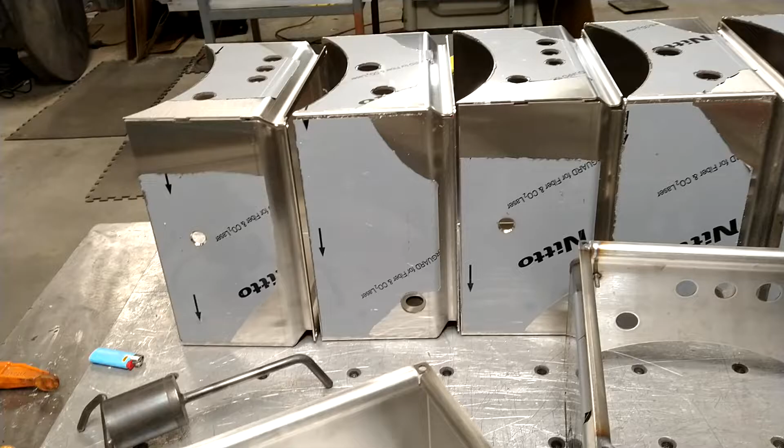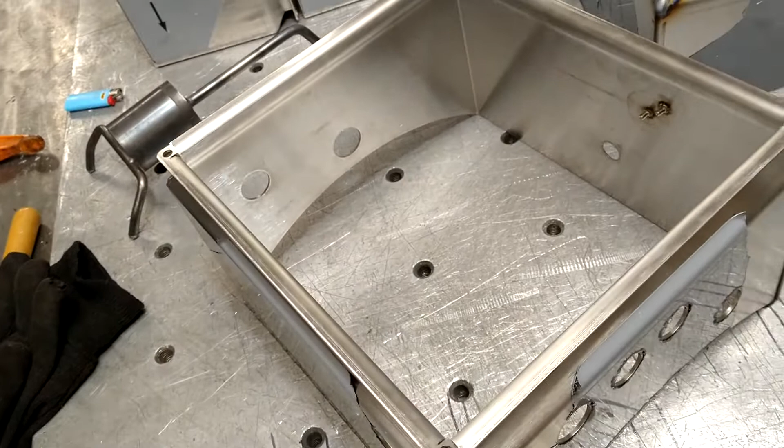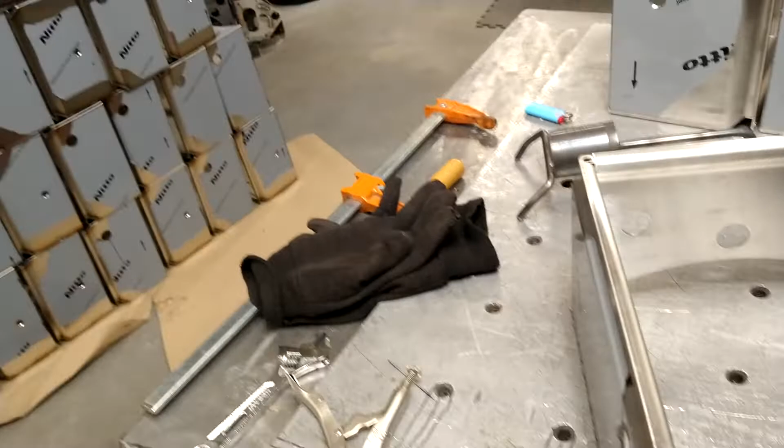In this video, I'll talk about how it's always good to have another source of income, not just one. I know they always say to stick with your career, but I want to show you some of the different things where I get my income.

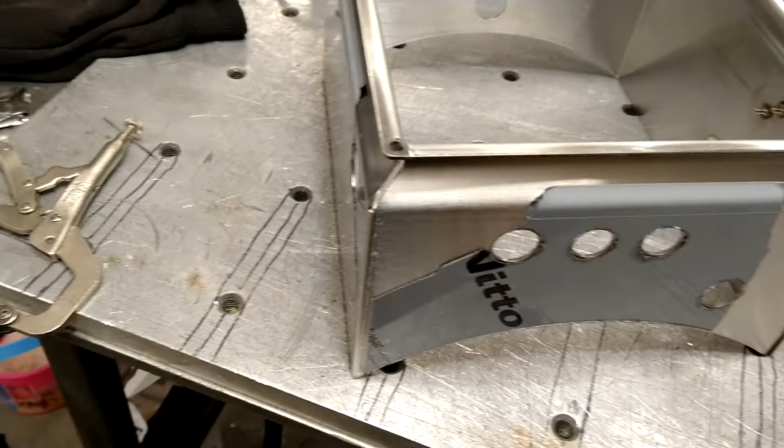One of them is welding. I get all this stuff sent in, and then I weld it. Everything is formed just like this, so all I have to do is weld it. They'll send me the print, I quote the job, and then I go pick them up, or sometimes they drop them off. But you always have to take into consideration the travel and all that.

Like in stainless steel, one thing I never used to quote was taking the masking off. I'd just look at the print, look at the material - 316, 08, whatever, 304 - and never took into consideration the masking, which takes a lot of time to peel off, cut out, and get ready. I should have put my kids to do it, but it still would take them a long time to take the paper off. So now I always ask if it has masking on it, and they let me know yes or no, and then I know how to go from there.

So that's my second main income. My first income is making mazes out of acrylic. I make mazes for this company, a lot of different products, most of them special one-time deal things. I make a lot for mice and rats, and that's what I got this CNC router for, where I cut all their parts.

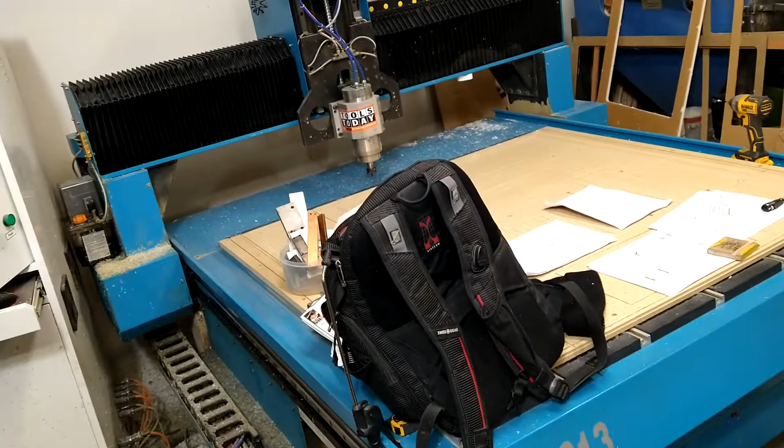My second thing is the welding. My third thing is like guards - I just got an order for 3 guards for COVID, for the stores. So here it is, I sell this online or around the area here. This is from a temp agency, they've got a couple places everywhere. They already bought a whole bunch of them for me, and usually order 3 or 4 at a time. They always have some weird sizes, and that's another income I have, making those.

So basically when COVID hit, one area slowed down, but over here it picked up pretty good to compensate for what welding kind of slowed down. The maze business also slowed down when COVID hit, but this already picked up.

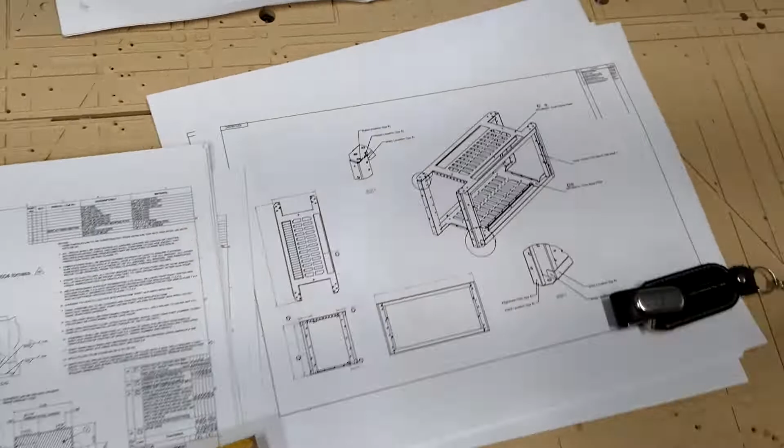Stuff like that - they'll send me jobs, like right now I'm gonna quote this job. This is a new customer, some kind of boxes, I don't know. The only thing is some are galvanized and some are cold roll, so I still don't know.

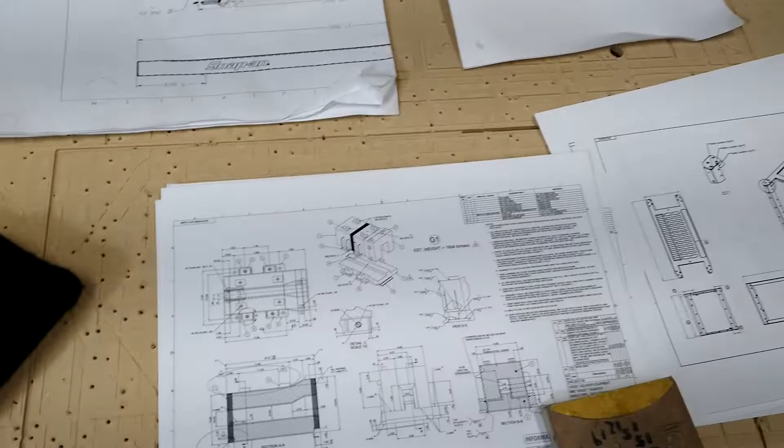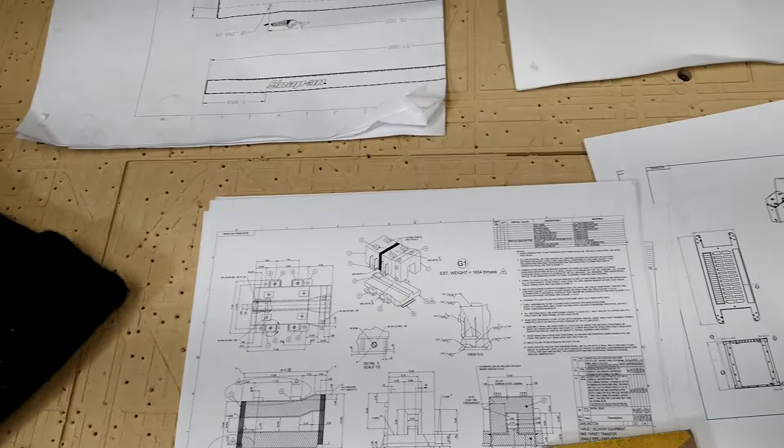And then this is for nuclear plants. I made a few before, I forgot to make a video about it. They go up to Canada, it's to hold radiation. These boxes, they fill them up with lead, and I made 7 of them. It was a nightmare, but it's pretty good money on it. They pay pretty good, but you have to have all this crazy certification. I had to take a lot of tests to be able to weld these parts for Canada, and I'm over here on the border of Illinois and Wisconsin.

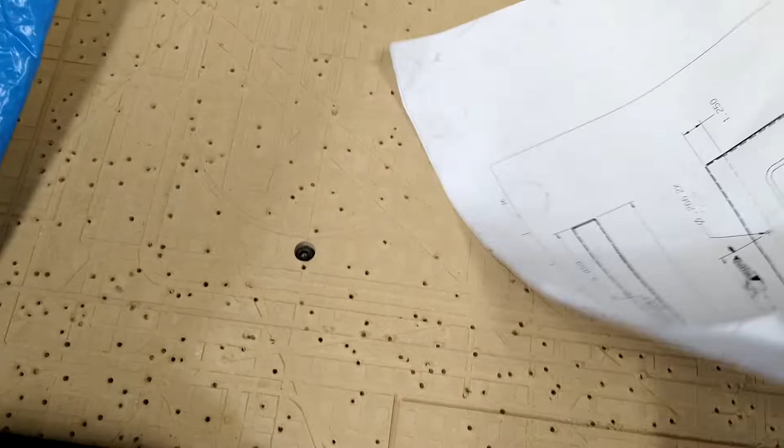So I guess now they order more, they want me to quote 4 different ones. And then I got another job from Snap-on, some tabletops they want me to quote. I don't know, there might be 2 boxes, I think they're just tabletops, I'm not sure. All I had to do was the welding, the handrails and all that. So that's good, there's all these different ones here that I have to quote.

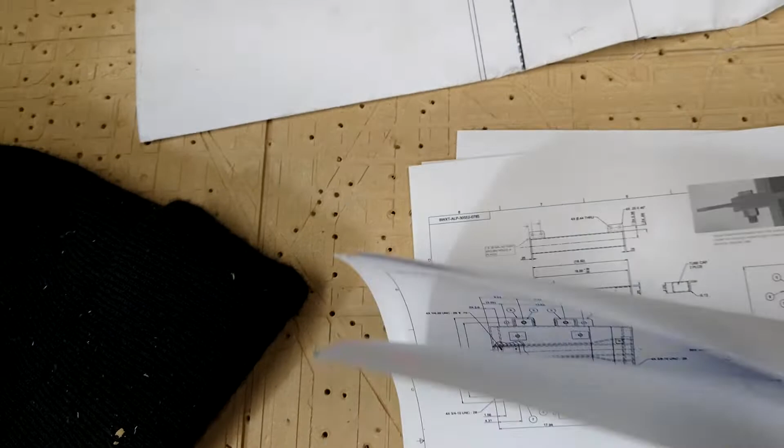So that's the welding, and then the income is just guards. Then the welding. My other income is engraving.

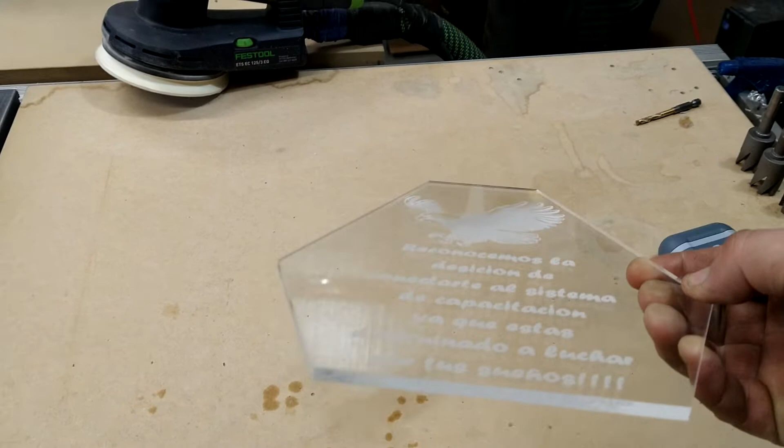I was turning it in, so you can see - I was making this sample for another job. This is gonna go down to Texas, they want to order like 300 of these, but they want to know what price I would give them. So here's where I was playing around trying to get the eagle right.

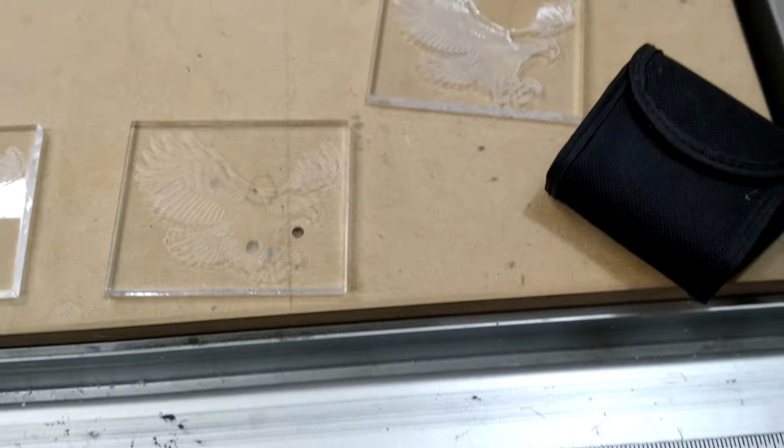You can see how I started. It was like real shiny, but I wanted more like a grayish white color, and then finally I got what I wanted, and that's how I ran this right here. So they liked it. They're just waiting for me to give them a price, to see how much, and they want to order like 300 of these.

Even I don't have really the time to do them right now, but I'll see. They're easy to make, because I might just put them in the laser, let them run, and I can do something else, and probably just take the sharp edges and cut. I was thinking cutting a little plate like this at the bottom, and then stand it up, and then probably just glue them.

Just so they just want to be able to stand up. And I guess when a member joins their club, they'll give them one of those. Something like that. Some products I sell online.

But that's another income. And then another income, I sell acrylic cut to size online. So that's picking up too, like different colors. I sell it on Etsy, eBay, and I can't remember some other place. And then I got the standard size and then custom made. Or if you want a custom shape, it's $10 extra. So whatever, that's picking up too.

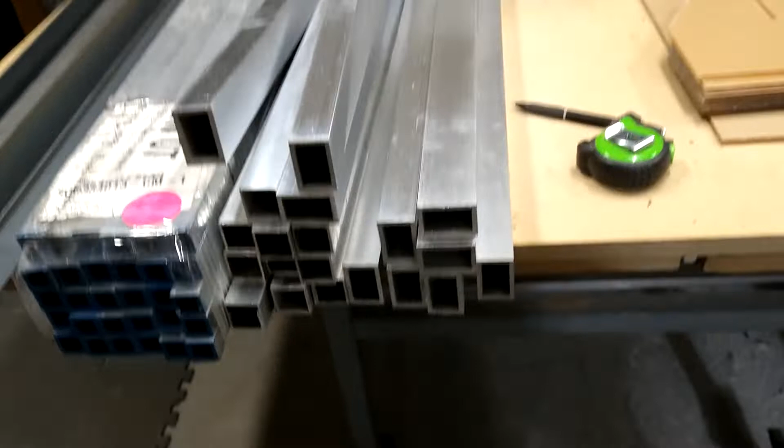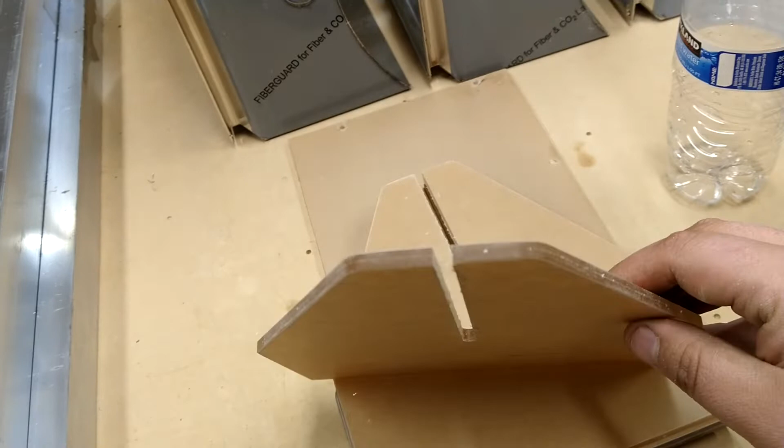And other whatever comes online, I should try to do. I got a lot of jobs lined up right now. This is a dog cage I gotta make. There's another cart I gotta start working on. So these are the feet for those guards. I just cut them on the CNC router, and that's it. Just cut it, and that's good money on that one.

And another income is sometimes I do design for some companies, that I do a lot of fixturing. A lot of fixturing design, like not as much as I used to because I'm so busy. But once in a while, I do some fixturing for some companies.

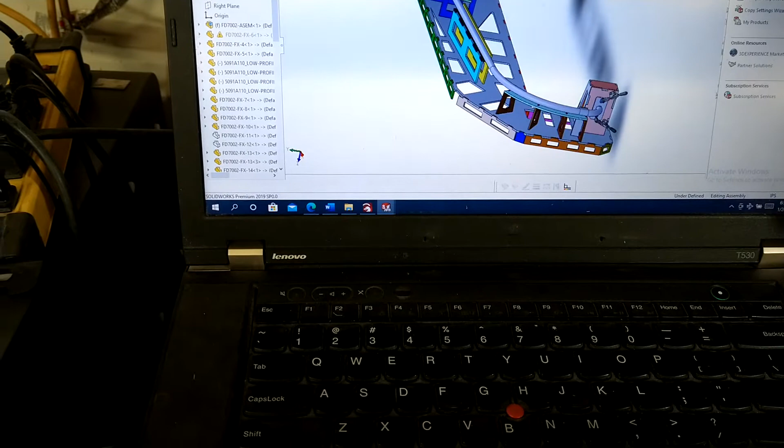So that's another income. And then another income is robots. I'm pretty good at repairing robots, anything pick and place robots, welding robots. So a lot of people know me by the robots. So once in a while I get jobs like that, like when they have an issue or they're trying to replace a motor, or they can't turn them on, or they're having issues with it, or stuff like that.

So usually it's real simple stuff, mostly operator mistakes, and especially welding-wise, it's usually fixturing issues, and they always try to blame the robot, and that's when I usually go. I go there because they're having issues with robots not welding the same spot and this and that. The robot's bad, but then it's the fixturing issue, and then I always leave there with the project to make a new fixture.

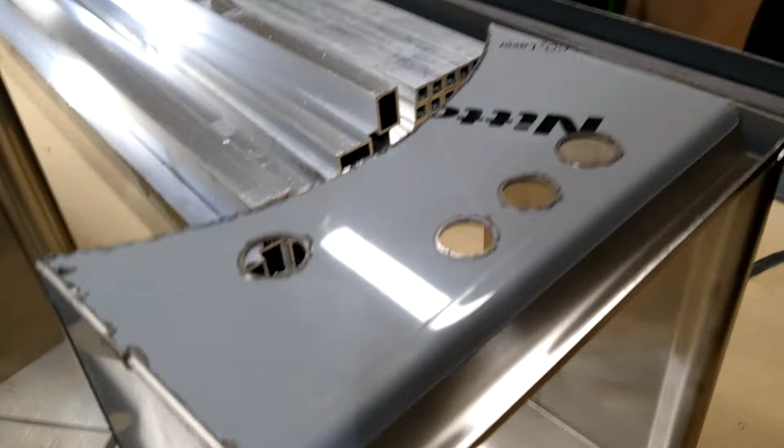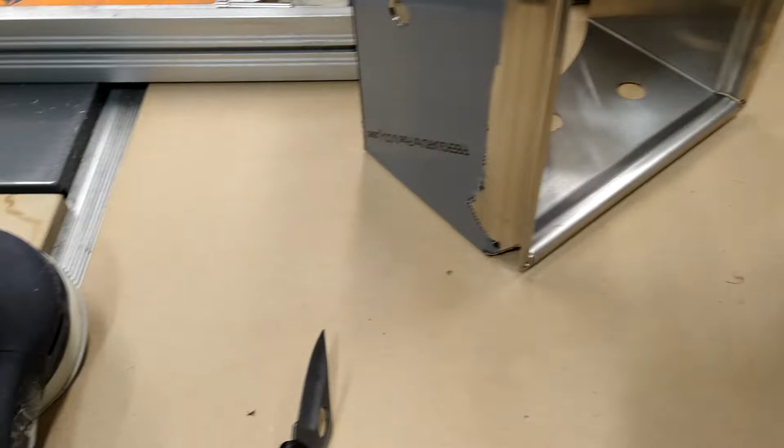So that's, you see, this is what I was talking about. Sometimes you'll be really stuck, and then you have to peel it, cut it, and sometimes we don't think about this when you're quoting a job. You just see the material, all stainless, all cold rolled, all aluminum, but somebody has to peel it so you can weld it, because you don't want all the shit burnt in there. So that's what you gotta keep in mind. I hate this, you get a weld that, you make sure you don't burn into the hole. They don't want you to weld the hole.

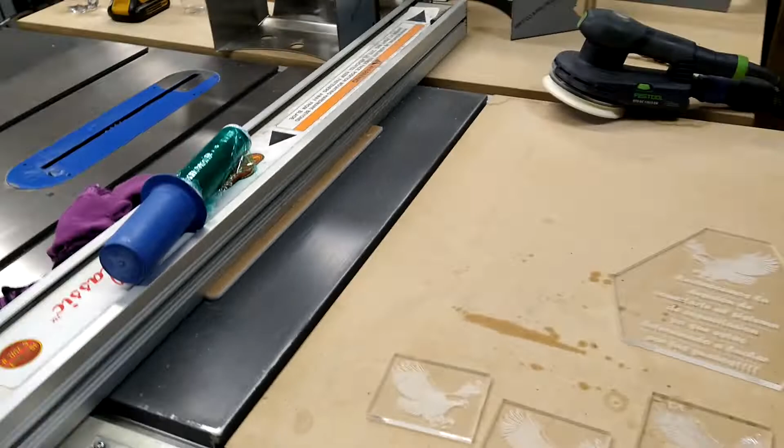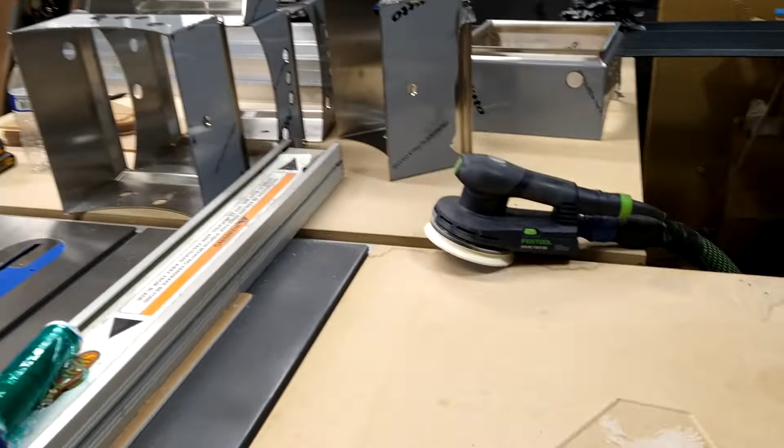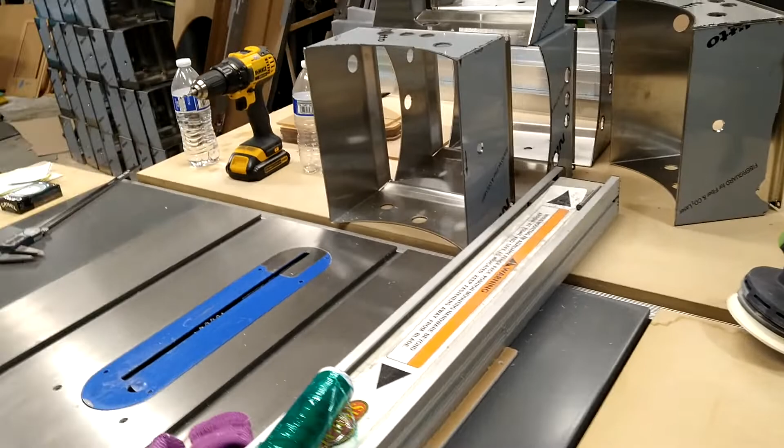So that's what I was gonna tell you guys, that there's just so many, there's another job, so many things you can make money on. You can be slow in one area and then pick up in the other one, and all this, and I'm not trying to brag or anything. I just want to show you guys that, because I had a lot of people always ask, like, how can they get work? It's just, you gotta dedicate yourself to it. It's not gonna just come, no one is gonna knock on your door and say, here, I got all this stuff for you, can you do it? You gotta go out there. You gotta build your reputation and your quality, and once, believe me, once you start getting around, people are gonna know you.

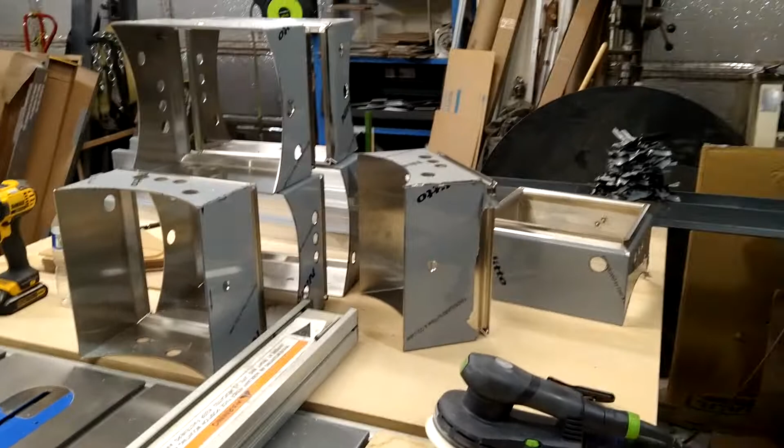You just gotta put yourself out there. You can't just watch TV all day or videos and think, oh, I want to make videos. It takes a long time to edit, and people always ask me why I don't edit, because I don't have time. Those people that make all those videos usually have plenty of time, so it's hard to believe someone doing all that. I would like to sit down and edit a video, but when I can sit down, I'm usually making a program for CNC, for laser, or designing a part - that's what I utilize my time on. I'm getting overwhelmed now, so I'm thinking of hiring somebody, but I work from home.

It would be nice to have somebody here. I have friends come help me once in a while, but nothing permanent. Now it's getting to the point where I need somebody permanent, at least to run the CNC or laser - like these pieces, I gotta cut 300 of them. The other thing I'm getting into is I wanted to buy a UV printer, but they're so expensive, like 20,000 dollars.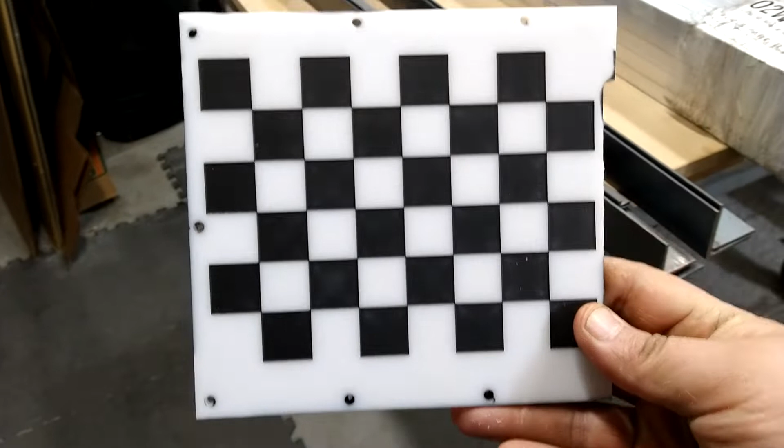So instead I'm getting into this - I had to make 27 of these big ones, so what I did, I engraved them on the laser, then put some ink on it, sanded them down, and it came out pretty good. The customer said they look better than the ones that were getting printed, and the lead time is so long to get anything printed on the surface. So now I'm gonna get all this work from them from now on - all their printing stuff, they're gonna give it to me.

So that's another thing I'm gonna be looking at. Eventually I want to buy a UV printer and a flatbed, at least a 48 by 48 printer, but they're like 30,000 dollars minimum. I had a couple opportunities to get one for a good price, but I didn't have enough money. Usually when I have the money, I can't find anything, and once I spend the money, another opportunity pops up, so it sucks.

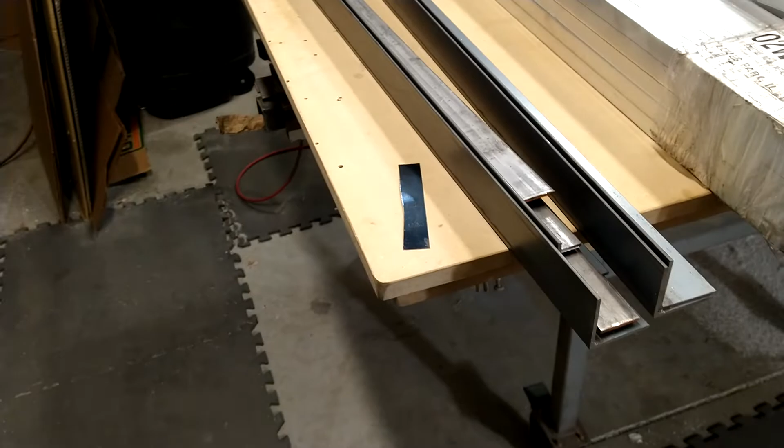So that's what I wanted to talk about - keep on going and let me know what you guys think. I wish I could make more videos close up with the welding, but I was thinking of buying those glasses that have a camera in the middle. I wonder how those would work inside the helmet.

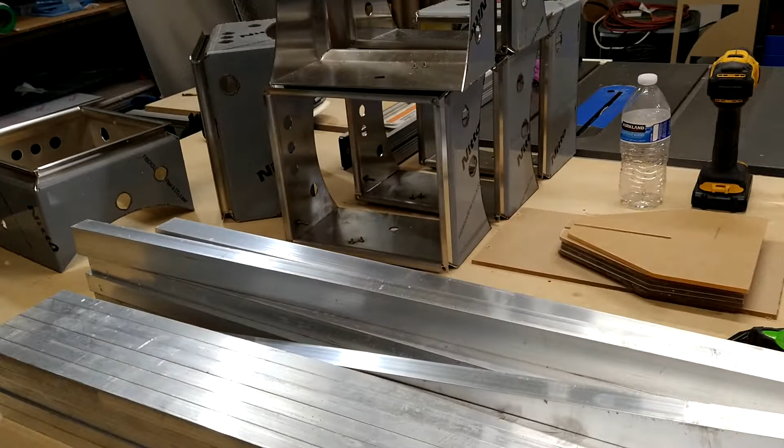Maybe I'll buy one, just put them on, record some welding, see what it would look like, then do my regular work and record to show you guys the process. I would like to make more videos about acrylic because there's not a lot of information out there and everybody keeps it a secret. I'd like to show people, especially the gluing and how to prepare your edges - you can't find anything on it. There's tons on welding and woodworking, but not much about acrylic. But anyways, thanks for stopping by, I'll see you guys.

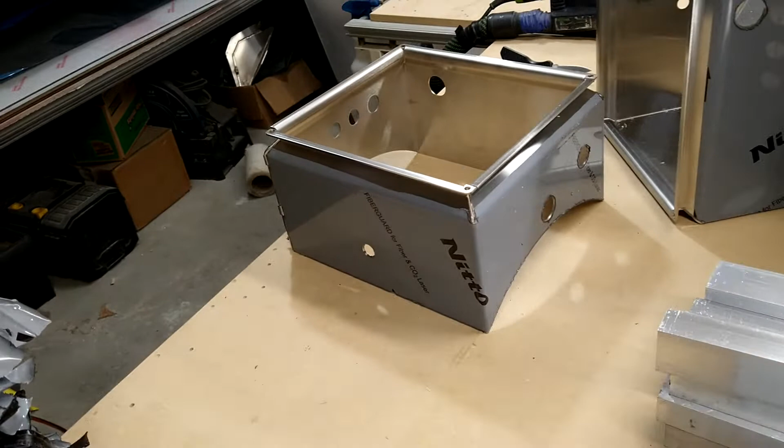Originally I was gonna make this video about the tungsten - this box is a pretty good example of how they showed me in school to sharpen the tungsten, and how I learned a different way in the field that works better, since some parts wouldn't work the way they showed me in school. At first I didn't want to change, I always thought school was the right way. I mean it might be the right way, but I don't use that method.

I had to, like, for right here, burn that hole - I'll show you guys in another video. But I gotta get back to work, I'll talk to you guys soon. Thank you for stopping by.